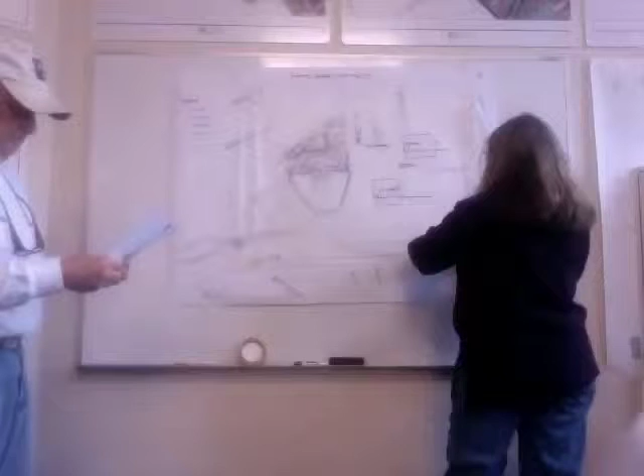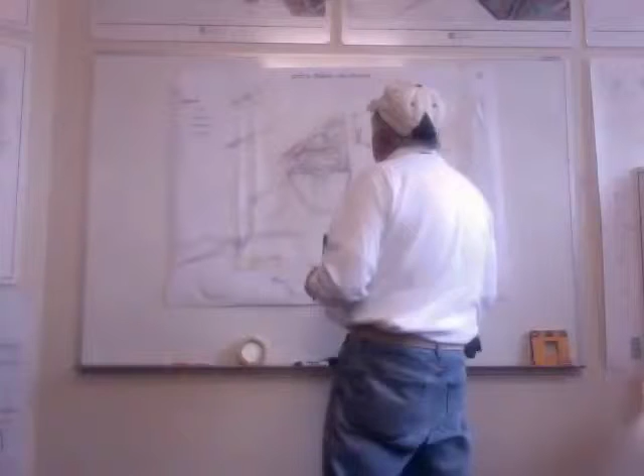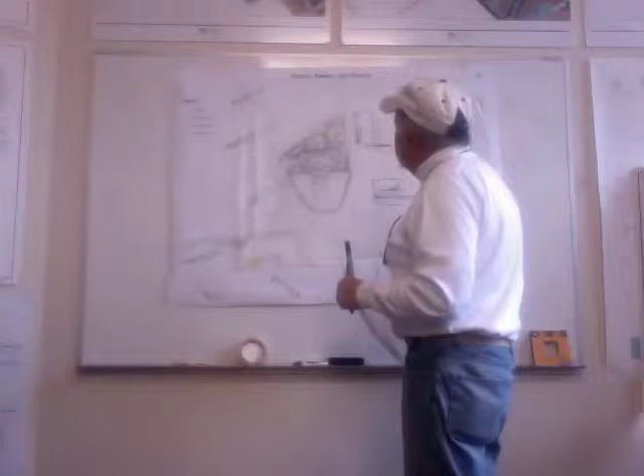What we thought about was putting the station in here and having two levels. The lower level being access to buses, and the upper level for our train station.

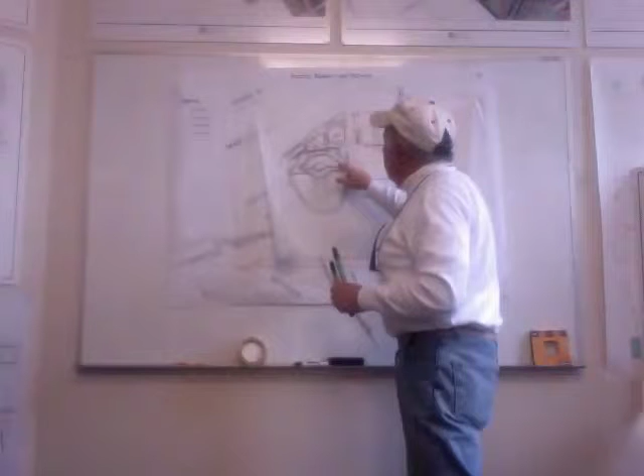We thought about parking here. We thought of developing a public space in here for taxi, bus stop, and so forth. Another building in here for Federal Express and parking and so forth. And, want to add anything, Johnny?

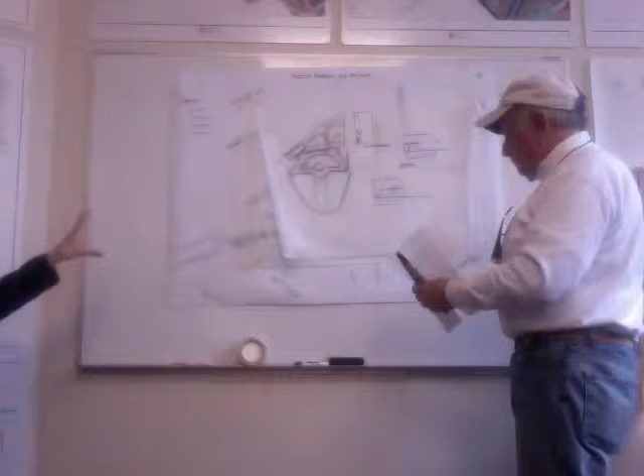Well, we looked at the current site, the way that the earth has been filled in there since the Bragdon station, and we thought of carving into it. You've got the response to the tracks and you've got the response to the downtown, and trying to reconcile that.

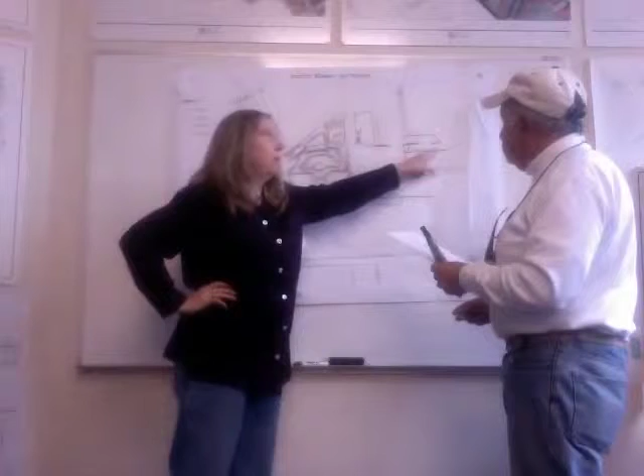And so, there's parking below grade and there's parking at grade that goes right underneath the entire facility. So that actually we looked at potentially a 3-level station that would have a restaurant or some combination restaurant observation piece on the 3rd level.

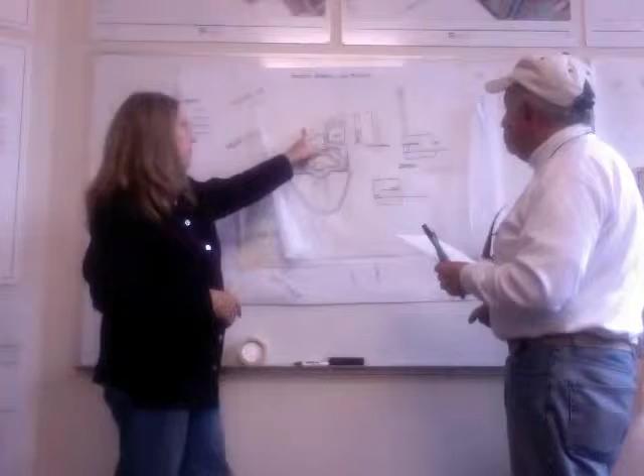And it would open away to a double height space as you entered from the train into the station, that you'd have a balcony, kind of an atrium area with flanking services on the main floor. Your drop off and pick up, and we wrestled with Central, whether it should be 4 lanes or 2 lanes.

We wrestled with the idea of doing a roundabout here to have traffic flow. And I like the way that Al reconciled this in the long run. But moving the buses off of this, making this a great public space of some kind.

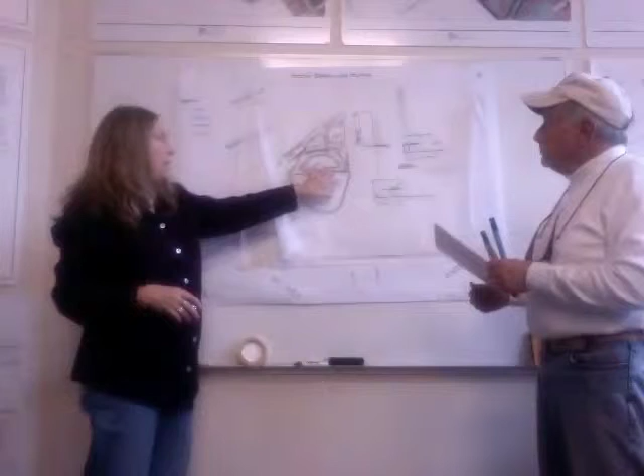It is large, and I too like those flanking buildings idea, framing this somehow, but maybe connecting and decking across the inner loop to create more of a connection to downtown, with the intra-regional buses being able to be here as opposed to out here. And some kind of capacity.

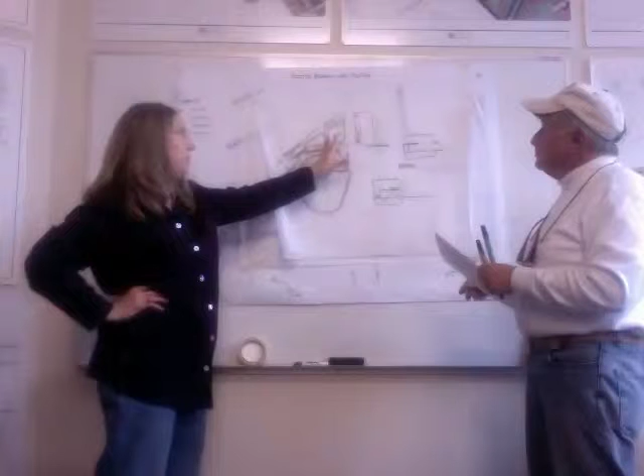We were looking at the Miami bus station and intermodal station, and the way that they have their buses that pull right into and access their train station there, which is really nice.

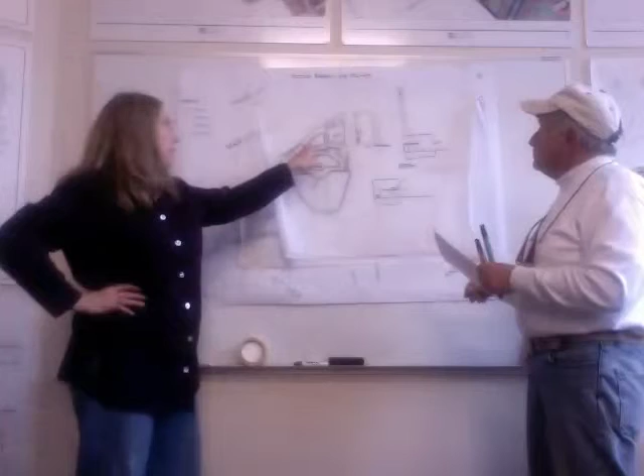But there's an opportunity here to do some sectional things that are very interesting in terms of entering parking here, going through and leaving, so that you circulate that way. And then this balcony, you're looking out over this and the entrance to the city. We thought that was attractive.

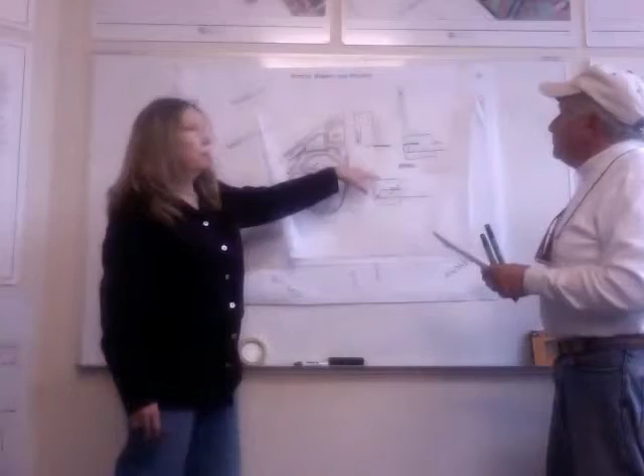And this is a long-term parking. If someone wanted to park their car and go on a fairly lengthy trip and leave their car, this would be a liner building. It could also house some of those services that the train station might want to incorporate, that they have to do with FedEx or whatever other kinds of things.

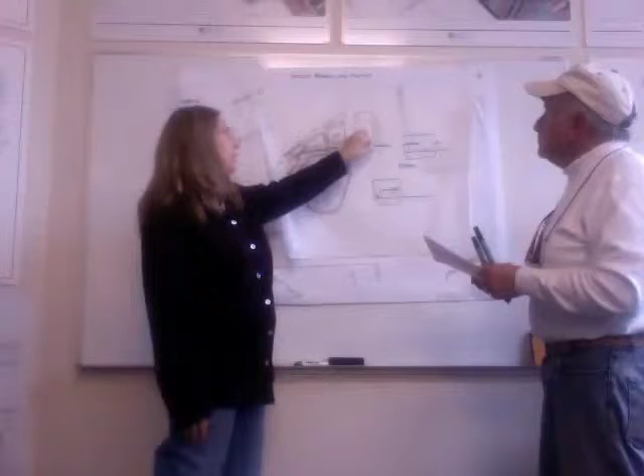There's some kind of inconsequential buildings here that could be rethought. It's very schematic, but anyway. Yes, and then this space in here, with a little further thought, we could develop it into all the ancillary things that need to happen in this area. We ran short on time and so forth, and that's what we came up with.

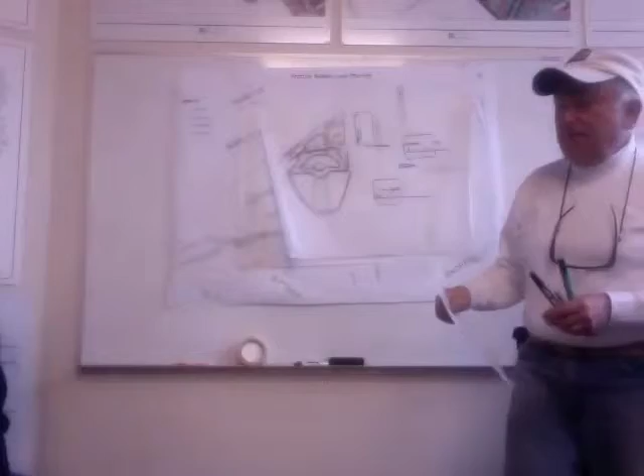Questions? So where do the buses come in off of what street? Yeah, show us how. They come in here, they come just in, going, and they would wait here. That's the Greyhound buses? Yes, Greyhound. Okay, so that's at street level, or do you go down? Yeah, no, it's at street. This is okay, all at street. They come in at this level.

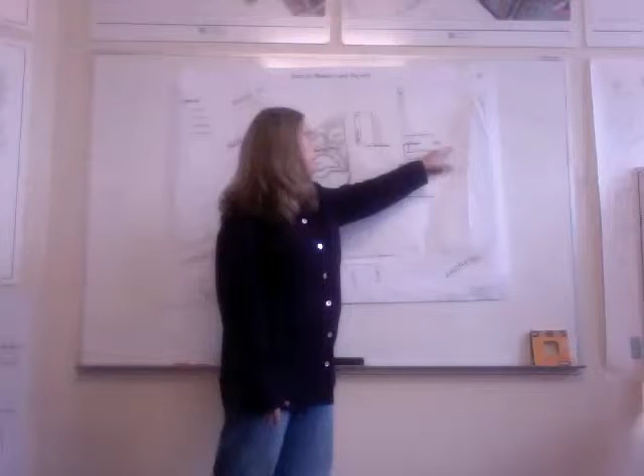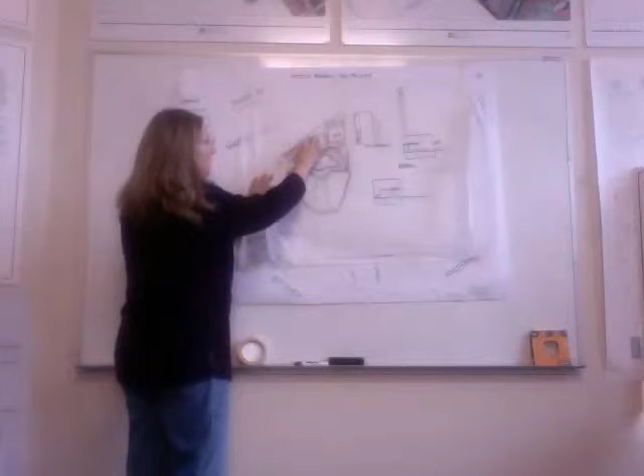So how do you get down to the other level? Where's the ramp? Whatever level, the below level? Yeah, you come in to park only below. You don't bring buses in there. You just come in for parking. Oh, I see. And this actually extends underneath. This is all underground with a green roof on either side of these.

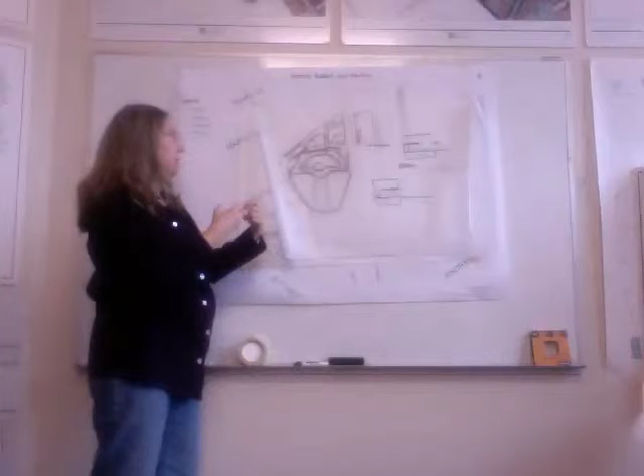Okay, right, I got you. So that, you know, you're cutting back into the existing landscape that's there and carving out. It's all fill. Right, right. So, okay, good, sounds good.